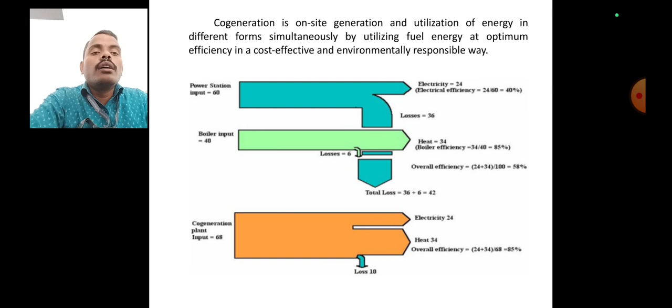Next is the heat to power ratio. In thermal power plants, they use a heat to power ratio. What is meant by heat to power ratio? It is a ratio of electrical energy consumption to thermal energy, or thermal energy to electrical energy, required by the industry. How much electrical energy is produced or utilized? Based on that, they use a heat to power ratio.

Next is cogeneration technology. What different types of cogeneration technologies do we have? First one is a steam turbine based cogeneration system. Next is the gas turbine based cogeneration system, the combined steam gas turbine based cogeneration system, and the reciprocating engine based cogeneration system.

In a steam turbine based cogeneration system, producing electricity is the main purpose. Fuel is burned in the boiler, and the flue gas is used for heating water in the boiler. The high pressure, high temperature steam passes through a steam turbine, and energy is produced. Steam expands in the steam turbine. The steam turbine is connected to the electrical generator and rotates it. Electricity is produced in the steam turbine based cogeneration system.

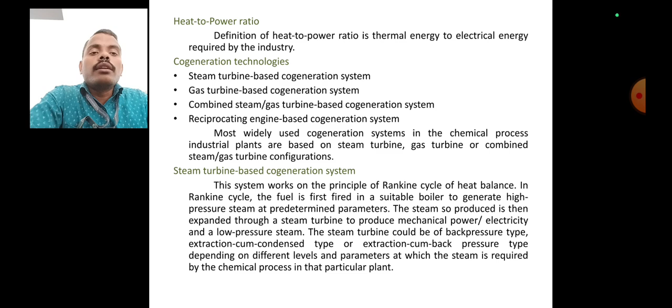The energy wasted in the condenser tubes and the flue gases is recovered and used for a process application. Same as the gas turbine based; here the component used is a gas turbine, and a combined steam turbine and gas turbine based cogeneration system is also available. A reciprocating engine based cogeneration system utilizes the waste energy rejected to the atmosphere in the radiator and flue gases. We recover this heat from the flue gases and radiator and use it for process heating and some industrial applications.

In gas turbine or steam turbine based power plants, the main focus is on increasing fuel efficiency. Commercially producing electricity, a plant efficiency of about 35% is achieved. Using the cogeneration system, utilizing the waste heat rejected from the condenser tubes and the flue gases, we recover that heat and use it for process heating and some industrial applications. We increase the plant efficiency to about 80%.

This overall efficiency means we are conserving energy, or reducing fuel consumption. Reducing fuel consumption means fossil fuel utilization is reduced, and the emission to the atmosphere is also reduced.

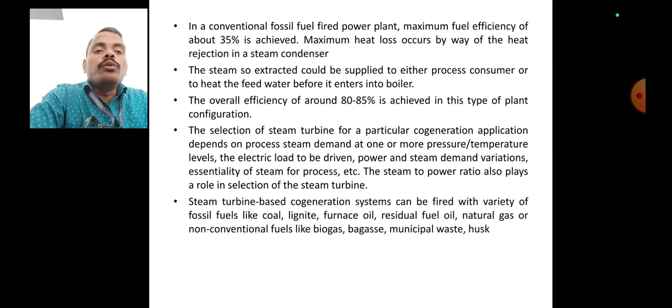Next is the gas turbine based cogeneration system. In a gas turbine, the main heat rejection source is the flue gas. The flue gas temperature is around 480 degrees Celsius to 540 degrees Celsius. We utilize this flue gas heat for process heating, or for the rubber industry and some special kinds of applications. It's a gas turbine based power generation system.

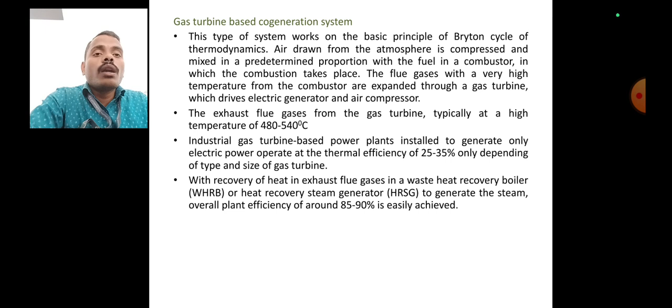Normally a gas turbine power plant has an efficiency of around 25 to 35%, depending on the type and size of the gas turbine. But using a heat recovery steam generator, or recovering the flue gas waste heat, the plant efficiency is increased to 85 to 90%. By this, we utilize more energy, reduce the usage of gaseous fuels, and generate more economy for a power plant or a nation.

This is a gas turbine based cogeneration system block diagram. Air is input to the compressor, then the air is compressed and its pressure and temperature are raised, then it is sent to the combustion chamber where the fuel and air mix and start burning. The high pressure, high temperature gases are then sent to the turbine and expand in the turbine.

It causes a rotary motion. The turbine connected to the generator produces the electricity because of the rotary motion. Next, the flue gas is sent to the supplementary fuel firing. A small amount of fuel is added and fired, further increasing the temperature of the flue gas. Then it is sent to the steam waste heat recovery boiler.

Here the heat from the flue gas is acquired by the steam cycle. Here the water is heated and converted into steam by using the flue gas heat. Then the steam passes through the process consumer. Process consumers may be rubber, galvanizing process, some heating purpose. In this kind of process, the heat is utilized in the process consumer.

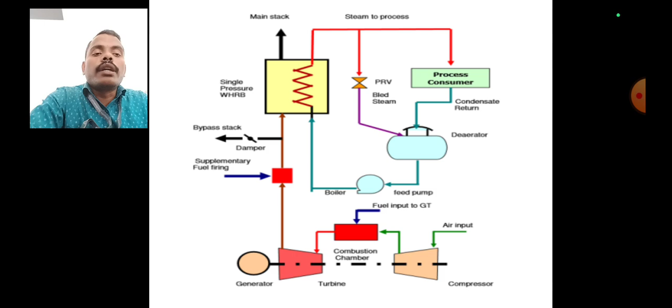Then the steam is condensed and comes to the deaerator. Next, the feed pump is used to pressurize the water to circulate throughout the cycle. Next, combined steam and gas turbine based cogeneration system. Combined means the steam turbine cogeneration system is combined with the gas turbine system. The efficiency is almost 90% of energy utilization. It is the highest efficiency in this series.

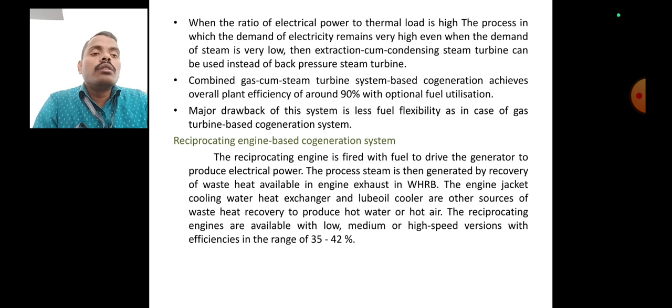Next is the reciprocating based cogeneration system. Reciprocating based means some power plants use a reciprocating engine for power generation. In a reciprocating based cogeneration system, normally the reciprocating engine has an efficiency of 35 to 42%. We increase the efficiency by utilizing the waste heat rejected in the flue gas and radiator of the engine, and increase the efficiency of the overall plant.

Air is input to the reciprocating engine. Next, the flue gas goes from the engine to the waste heat recovery boiler. The waste heat recovery boiler is a type of heat exchanger. Heat is transferred from the flue gas to the water circuit. Then the hot water or steam is used in the process consumer.

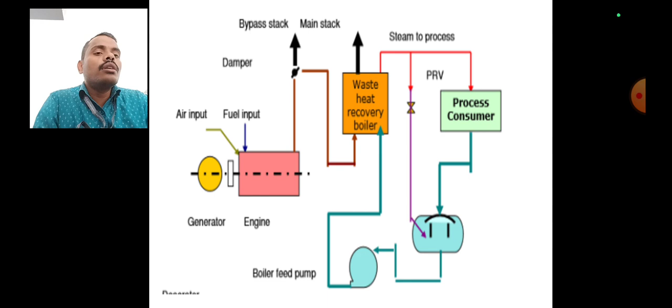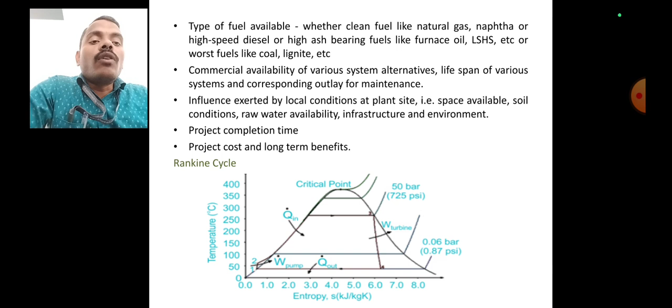Next is the Rankine cycle. It is a TS diagram of a steam cycle. The horizontal parallel lines are the pressure lines, and the vertical lines show the cycle flow of the water, the change of phase or state of the water in the Rankine cycle. Next is the advantage and disadvantage of the Rankine cycle, and the reheat Rankine cycle.

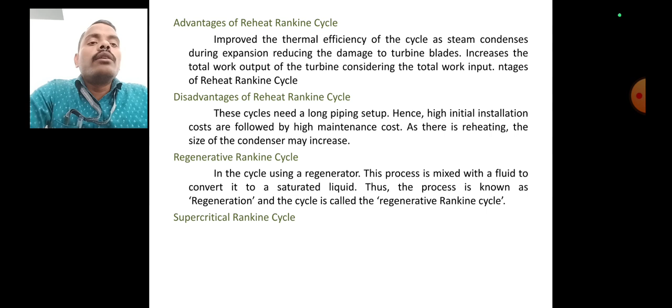Reheat Rankine cycle means after expanding in a single stage of a turbine or a single high pressure turbine, the steam is then sent to the boiler and reheated to a high temperature, and then expanded in the next lower stage of the turbine. By utilizing this, we increase the efficiency of the plant.

Next, the cogeneration system has the topping cycle and bottoming cycle. What is meant by topping cycle? Topping cycle means the primary focus of energy production is electricity. Next, bottoming cycle means our primary energy need is a heat source. In the first one, the primary production is power production, electricity production. Then the waste heat is used as a heat source.

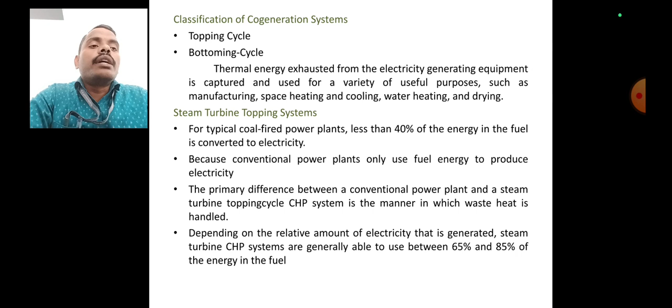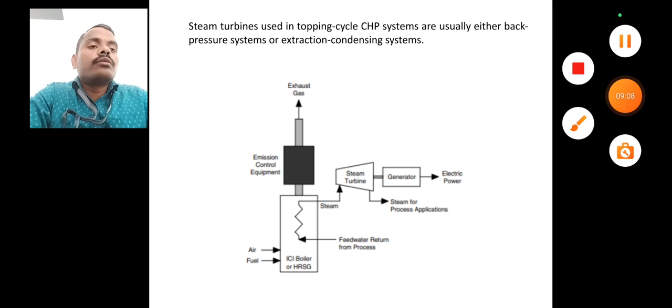Next one is the gas turbine based topping system, with a minimum size of 500 kilowatts to hundreds of megawatts. In the gas turbine based topping cycle, gas turbines operating at higher temperatures are used throughout the world as an effective way to simultaneously produce power and heat from a single fuel source. A gas turbine based power plant is the simplest plant.

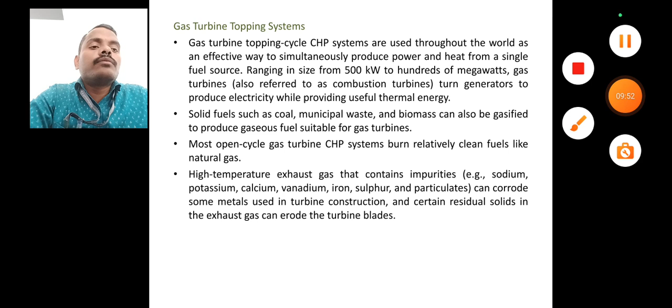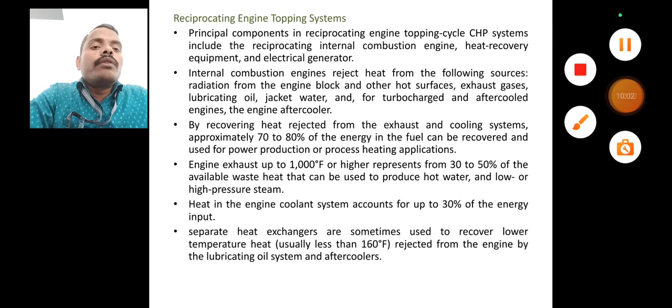Next one, reciprocating engine topping system. By using a reciprocating engine topping system, the efficiency of the plant is increased up to about 80%.